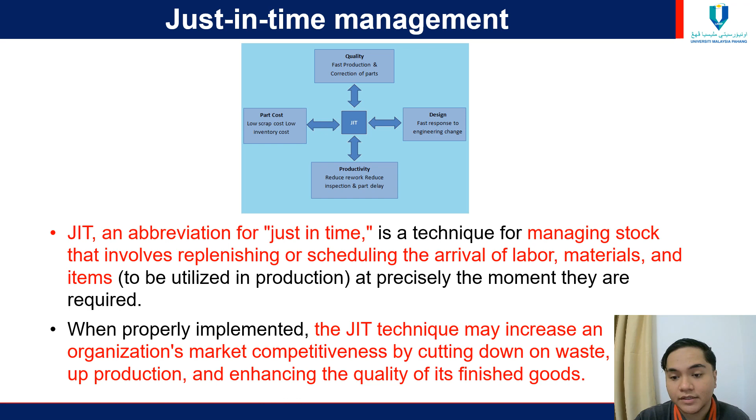To the next slide, I would like to talk about the background and history of just-in-time. As we can see here, this is the founder of just-in-time. After Japan's involvement in World War II, as a result of the diminishing market share in the auto industry, the Toyota Motor Company plant became the birthplace of the just-in-time philosophy under Taiichi Ohno. He is considered the father and originator of just-in-time, because of his dedication to work and his application on the production line in Japan, and the revolution of the automotive industry.

Henry Ford first created the production line. Henry Ford, the founder and CEO of Ford Motors in America, with his application of the assembly line, was the first to achieve just-in-time in the 1920s. He improved response time by producing a simple, small, reliable car that many could afford. By 1926, the company could produce a car from raw iron in 48 hours with 40% less manpower.

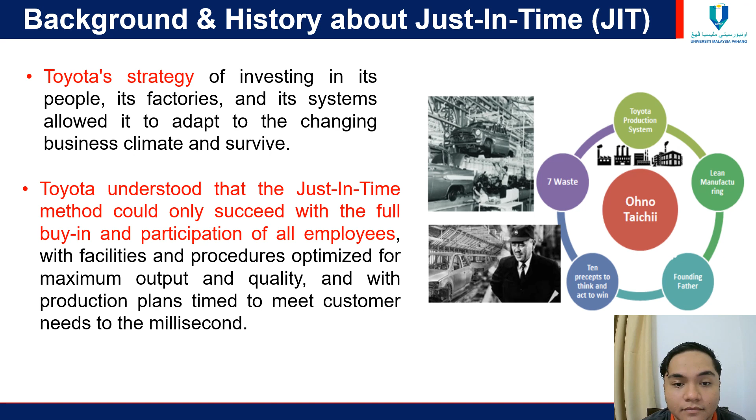In this slide I will talk about a case study on the Toyota production system using just-in-time. As you can see here, this production system was developed by Toyota Motor Corporation. In the concept of just-in-time and Jidoka, both have their roots in the pre-war period. Sakichi Toyoda, founder of the Toyota Group of Companies, invented the concept of Jidoka in the early 20th century.

In the Toyota production system, they seek long-term commitment to quality efforts with continuous improvement, so quality must be a higher priority than cost. This means minimizing waste, eliminating quality inspectors, and making quality everyone's responsibility in the Toyota production system. That's the concept of just-in-time in the Toyota production system.

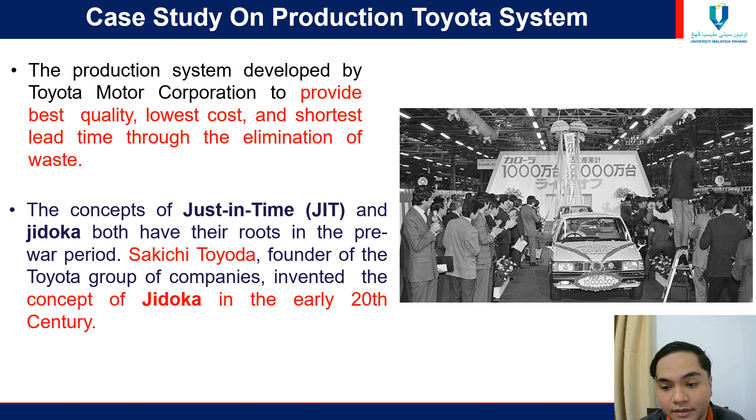We can talk about the engineer named Taiichi Ohno. He's the father of just-in-time, because he made Toyota more famous at that time, and his capability created a new production flow. At that time, car production became more quality-focused, faster, and minimized waste. That's why it was implemented in the Toyota production system.

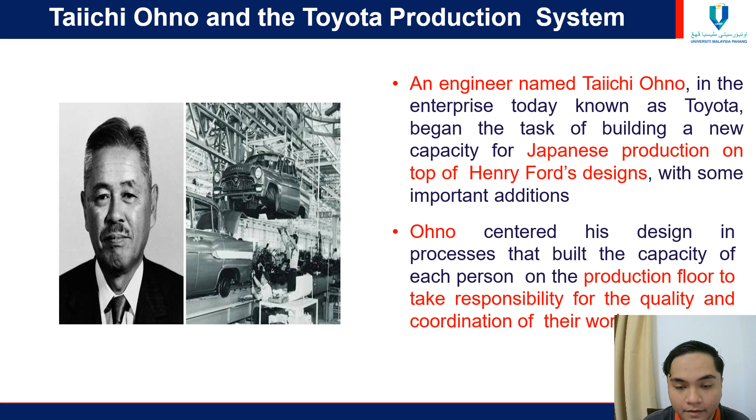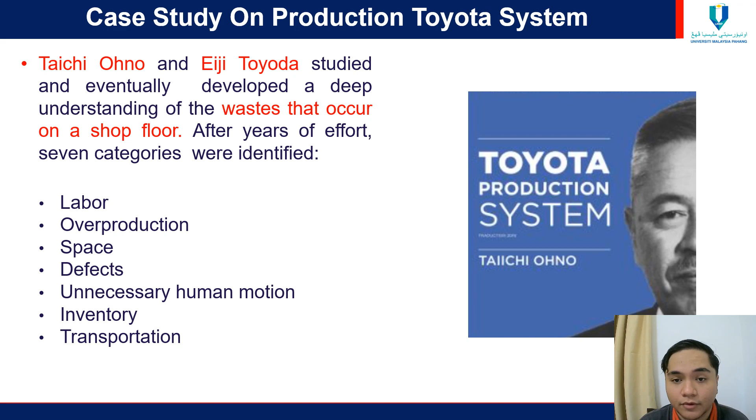So next, Taiichi Ohno and Eiji Toyoda studied and developed an understanding of the waste that occurs on a shop floor. After years of effort, seven categories of waste were identified in just-in-time: labor, overproduction, space, defects, unnecessary human motion, inventory, and transportation. This relates to the flexibility of the system in total production. So that's why Toyota production system is very good.

This technique was first adopted and publicized by Toyota Motor Corporation of Japan as part of its Toyota Production System, TPS. The types of waste defined by TPS are: first, waste of overproduction; second, waste of waiting; third, waste of transportation; fourth, waste of stocks; fifth, waste of motion; sixth, waste of making defects; and seventh, waste of processing itself.

In this process, they are driven by a series of signals or kanban that tell the production process to make the production line considerably more improved than before.

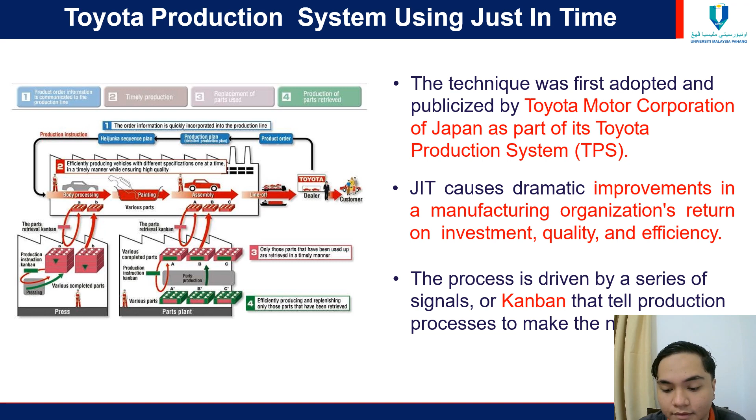This is the nature of the traditional Kaizen activity. We can see that the Toyota production system understood that to reduce the cost per vehicle, they must start from the production design stage. Then they must set the cost of each part and standard time for the production. In the next stage, they can produce this part and vehicle to attain this cost by carrying on a Kaizen activity.

Work in progress is much less in the just-in-time system because goods are assembled just before they are sold. Components are fabricated just before assembly is made.

The zero inventory philosophy is a method by which a business maintains no physical stock of any kind and reserves just the goods it will need to meet its requirements. This involves eliminating disruption in the process through standardized parts and simplicity, reduced lot size, shorter cycle times, and preventive maintenance.

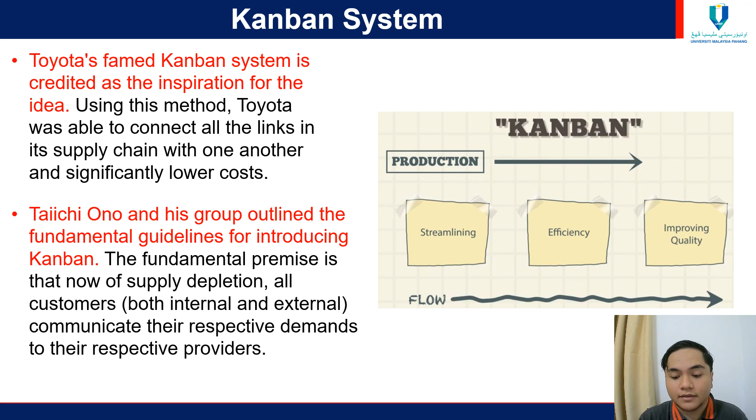Toyota uses a Kanban pull system throughout the production process. There are two systems: pull and push. The pull system is made to order, while the push system is made for inventory. There is flexibility in the system designed for testability in the process, like Poka-yoke mistake-proofing throughout the entire process.

In this slide, I will talk about the just-in-time environment and its elements. First, setting up time: setting up a just-in-time system effectively requires less time in general.

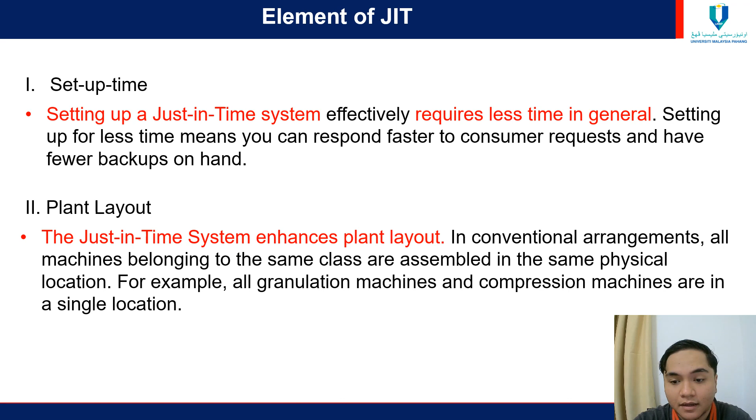Next, flexibility of workforce. Workers in the just-in-time inventory system setting, often set up in small cells with tools needed for several steps in the production process, should be able to do more than one job. An underutilized employee in just-in-time is also considered a waste.

No blame game — teamwork and supplier-customer partnership are important. Defect rates are reduced with just-in-time technology, so there is no longer a view that stocking up is worthwhile. Companies establish long-term relationships with a few suppliers so that parts are 100% defect-free, delivered where and when they are needed, in the exact quantity, working together, eliminating inspection of parts, and communicating problems to suppliers in a positive manner.

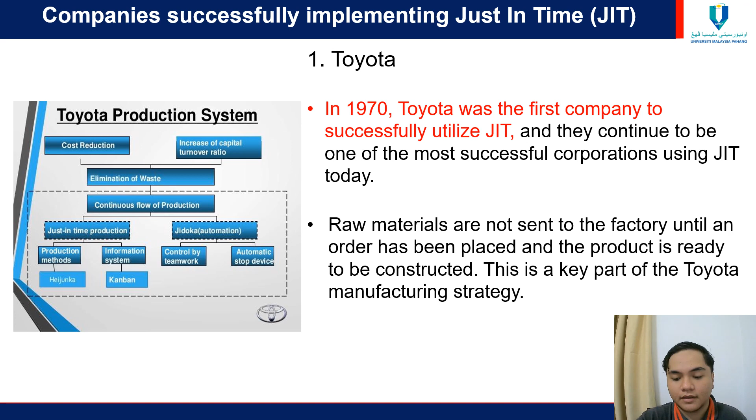In Toyota, they eliminate safety stock, zero inventory. They reduce WIP. Just in time is not an inventory control system. The reduction in inventory opens up space.

Important factors in Toyota's success: in order to ensure that they always have enough raw material on hand, a small amount is stored at each production station. When this runs out, it is replaced. Marketing in Toyota must understand the specs well, and they need to create an economic process, train people, and keep the customer in mind.

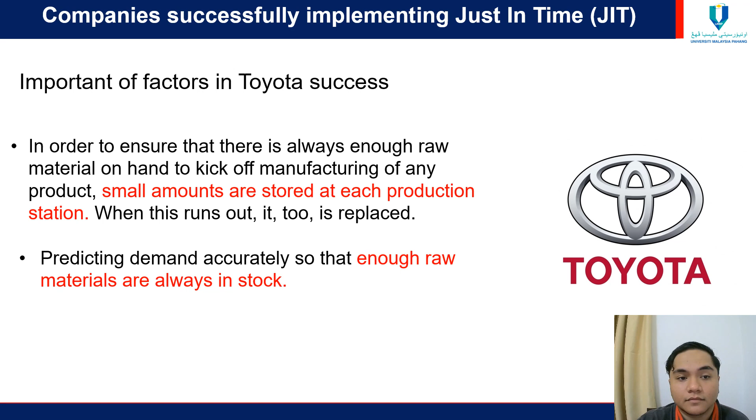The second company that's successful in implementing just in time is Apple. Apple Technology Corporation has successfully implemented the just in time idea into its production process. By building strong relationships of trust with their vendors, they were able to reduce the amount of time spent on stock preparation before placing orders.

Apple is able to reduce the amount of time spent, because we know that Apple is the most famous smart company in the world. They have phones, laptops, earbuds, watches, everything. So they need to make faster production of their products, but it must be good, so it must be fast too, because of customer demand.

So as you can see, the important factor in Apple's success is the desire of Apple's suppliers to maintain stock levels, which releases Apple from the burden of doing so. That's an important factor in Apple's success.

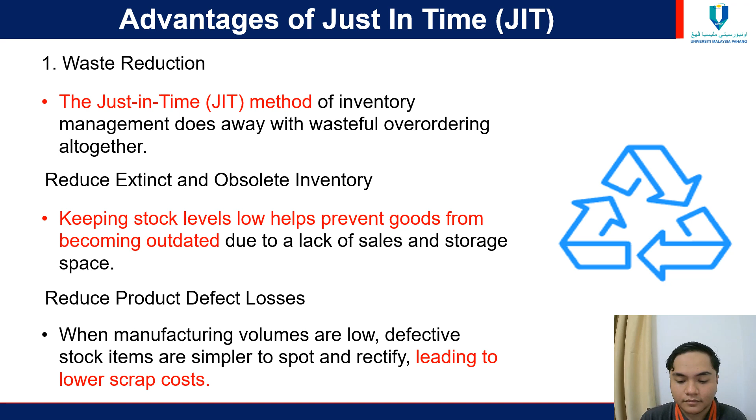Second, improve efficiency. By avoiding the purchase and storage of surplus resources, JIT reduces operational expenses, improves inventory turnover rates, and reduces raw material inventory.

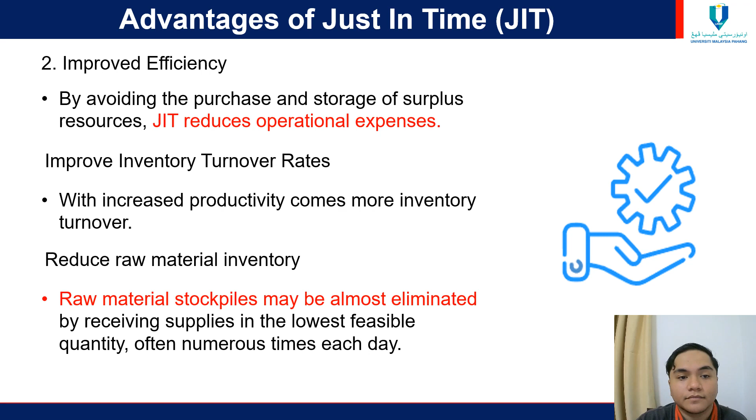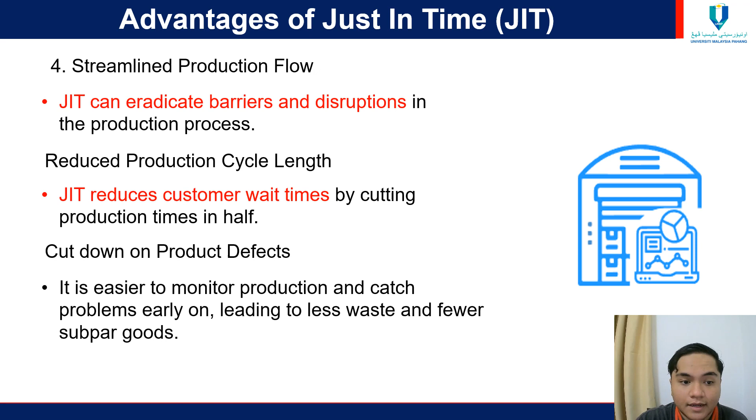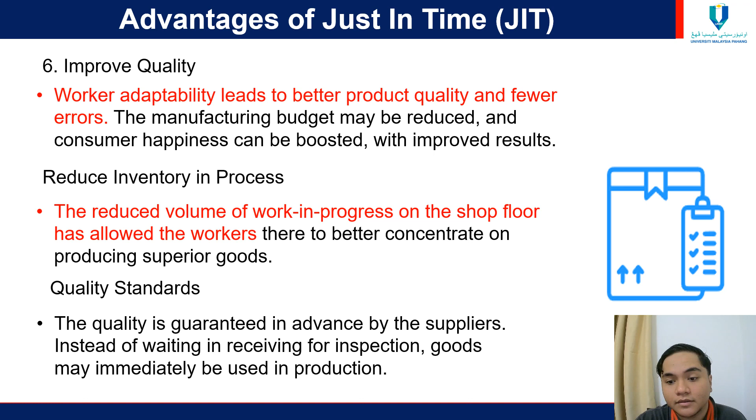Third, greater productivity: enhance product cycle time, simplify change orders. Fourth, streamline production flow: reduce production cycle length, and cut down on product defects. Fifth, lower costs: reduce costs for raw materials, and reduce labor expenses. Sixth, improve quality: reduce inventory in process, and improve quality standards.

Stock control using just in time. What is just in time stock control? Technically, just in time control is inventory management that allows a company to reduce spoilage and save money. A factory which produces less variety keeps sub-assemblies in inventory, while a variety production factory defines standards carefully and uses common components in multiple products.

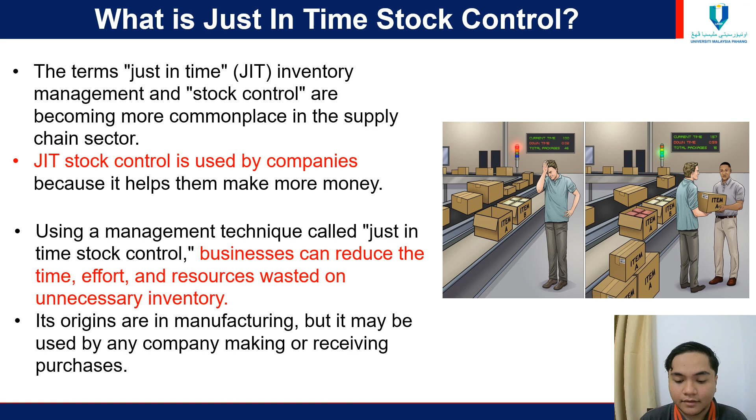The terms just-in-time inventory management and stock control are becoming more commonplace in the supply chain sector. Just-in-time stock control increases throughput, reduces the need for floor space, saves time, and increases responsiveness. This concept of just in time, which stands for JIT, is a subset of the larger lean manufacturing movement. So we can see the principles here: first raw material, second finished good.

How does just in time control work? Just-in-time stock control works when a company only gets stock when it needs it. Its goal is to minimize stocking costs and maximize turnover. Industries have been using this just-in-time inventory management since the 1980s because of the revolution of the manufacturing industry.

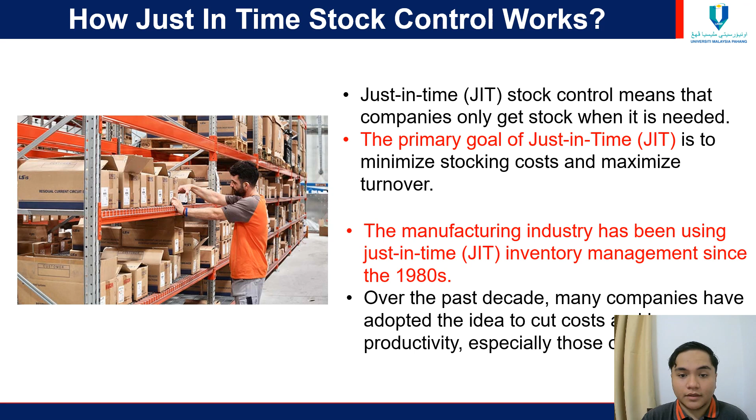The next slide shows the elements of the just-in-time stock control system. The first step is review and planning. We must ensure that the items are well designed, processed, and carried out, so we can make an analysis of our whole production process.

Step 2, managing total quality control. Our priority should be making a complete quality management system. Everyone is involved in this task because in just-in-time stock control, we must take care of total quality management, production management, supply management, and inventory management. All of that must have total quality control.

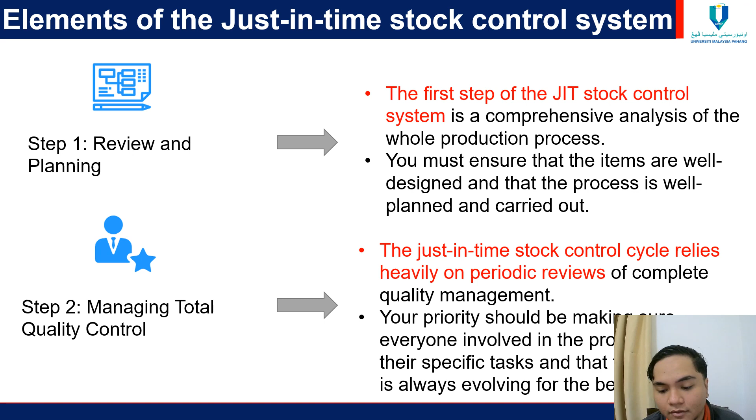Third, pull using Kanban. Toyota has made extensive use of the Kanban technique in Japan. Workers would remove the cards from the materials and return them to the beginning of the queue.

As we can see, in a Kanban system, Toyota implemented just-in-time in production management. Toyota uses a Kanban pull system throughout the production process, so each task in the process takes an identical length and work content. Everyone works at the same pace to reduce bottlenecks.

Step 4, establish a relationship. The effectiveness of a just-in-time stock control system depends on solid vendor connections being set up in advance.

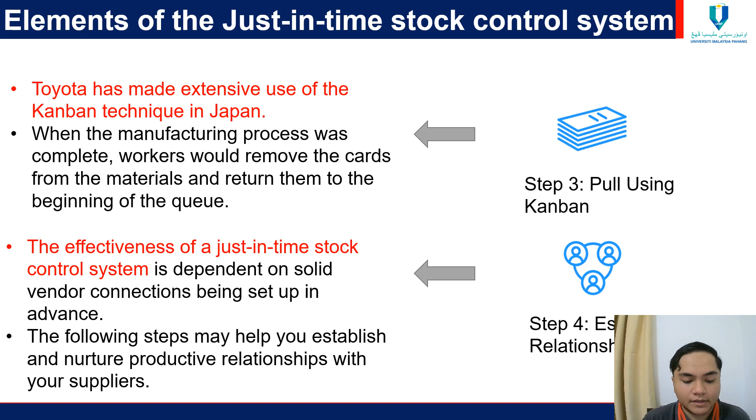The production control center schedules the necessary quantity of raw material. The objective is to achieve a smooth, synchronized flow at a uniform rate. When an unexpected large number is required, production is scaled up gradually, one at a time.

Step 5, fine tune the inventory. If using just-in-time inventory management, we need to make sure that everyone working on the project is aware of the rules. The production control center schedules the necessary quantity of raw material. Eventually, all components are pushed to the final assembly, so improvements are implemented by either management or the employees themselves.

Step 6, build the team. The just-in-time stock control system is useless to your company if you do not endeavor to increase the competence and expertise of all your employees. When building the team, we must make sure the team knows our goals, for example making cars, food, or any other product.

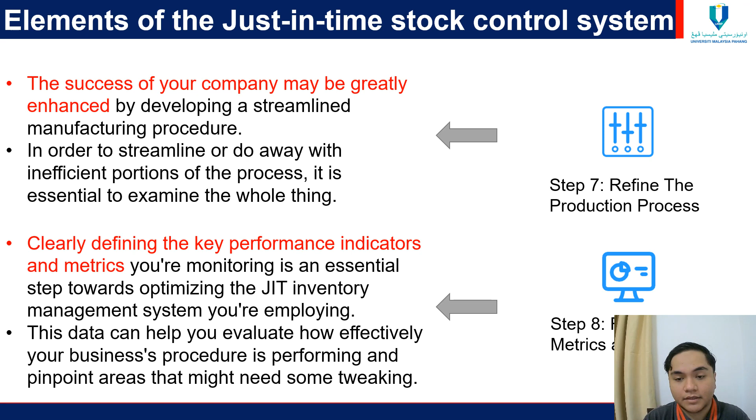Step 8, review metric KPI. Clearly defining the key performance indicator metrics is an essential step towards optimizing the just-in-time inventory management system you employ. This applies to all levels of employees, all functions, all processes, all output and input, and all suppliers and customers. Control is the ability to make processes behave as we intend.

In conclusion, just-in-time inventory control is a tool that companies use to get rid of excess stock. It involves measuring the effectiveness of the current situation, redefining documentation, and determining what can be done to prevent problems from happening in the future. For just-in-time inventory control to work well, there needs to be a lot of careful handling of the supply chains.